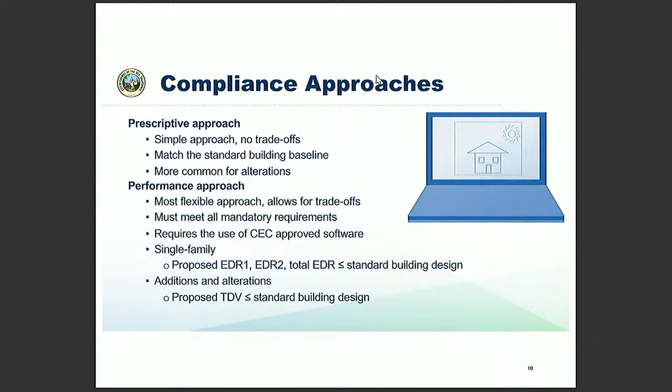These are all the energy design rating performance requirements based on your performance approach.

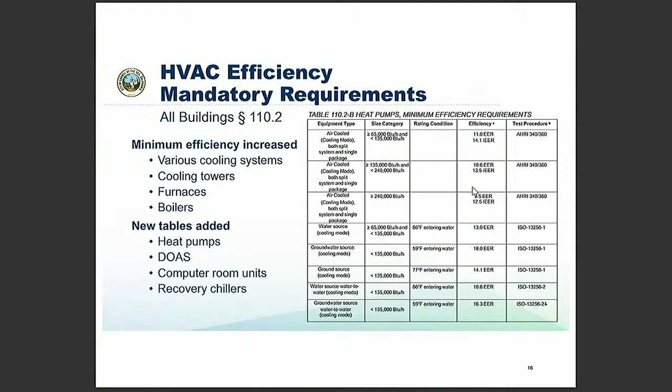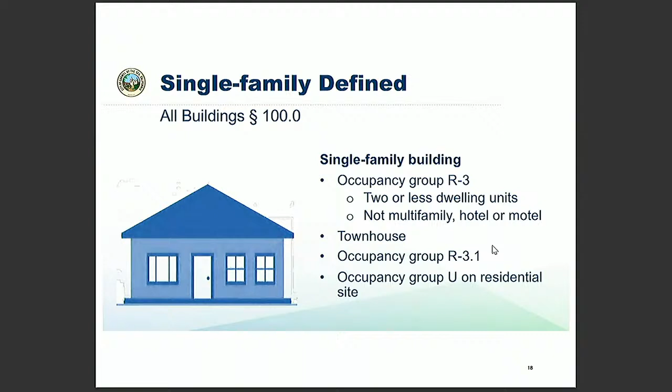So for single family, these are the classifications: R3, 2 or less dwellings, non-multifamily hotel or motel, townhouses, group 3.1, again, may not apply to Carmel specifically, and U occupancy groups on residential sites, meaning garages.

So insulation mandatory requirements, they have made some changes for roof deck, ceiling, and rafter roof insulation. The main one falls under the building code. If you were to design a house under the building code rather than the residential code, there are some more strict insulation requirements. We will get into that a little deeper later on in the slides here.

The insulation requirements, I wouldn't say have been reduced, but they've made exceptions for the ducts and air handling portions of the HVAC systems within the conditioned space of a home. It does not require insulation in those areas if you choose to design your system that way.

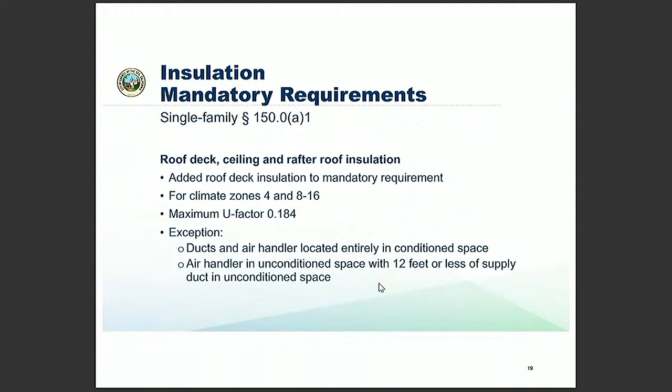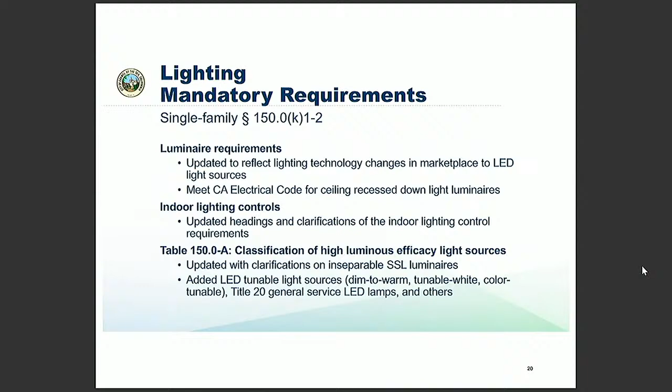So lighting requirements, specifically LED light sources. They're making vast improvements in the LED lighting. So there are various classifications, solid state lighting, which is essentially all the various types of LED lighting that are required. This table is actually a good reference here.

On the left side of the slide, numbers 1 through 6 are not required to be JA8 compliant. So your light cans installed outdoors, other LEDs for decorative lighting, pin-based fluorescent light source using electronic ballasts. If you're hardwired into a high-frequency generator induction lamp, you're not required, and ceiling fan kits that have to meet other lighting requirements, but not the JA8 requirements.

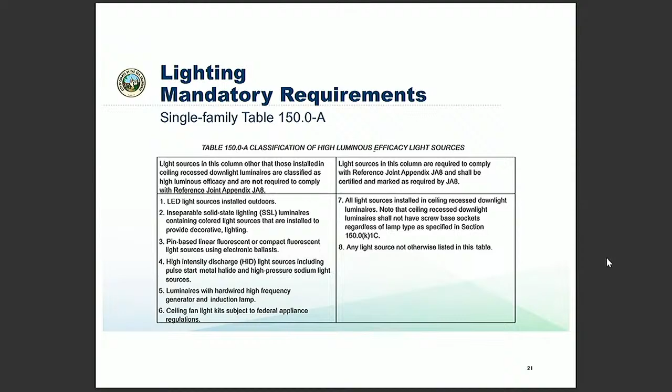All other recessed lighting, downlight within the homes are required to be JA8 compliant, and any lighting that is not specifically listed on this table.

So ventilation requirements, the ducts are still required to be R value 6 or better. Again, this exception about the duct systems located in conditioned spaces. There are portions where if you go through unconditioned space, the entering and coming back through into the conditioned space are not required to be insulated, but the portions that are in the unconditioned space are.

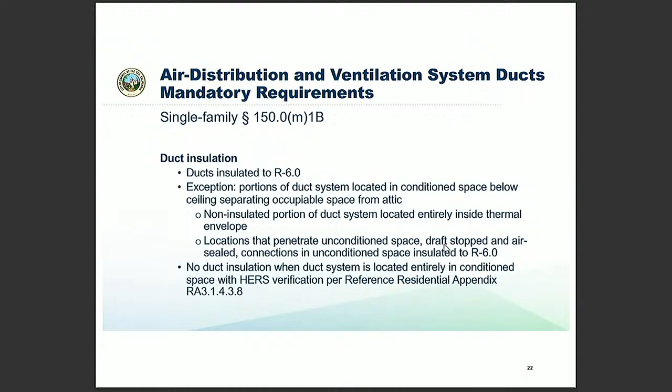This just clarifies the conditions and terminology for the duct sealing tests. I don't believe it's mentioned on the slides, but there is a new requirement. The previous requirement was 40 feet of ducting. If 40 feet of ducting was to be replaced, then you had to have the duct sealage test. That's been reduced to 20 feet, so that's an intensification of that requirement.

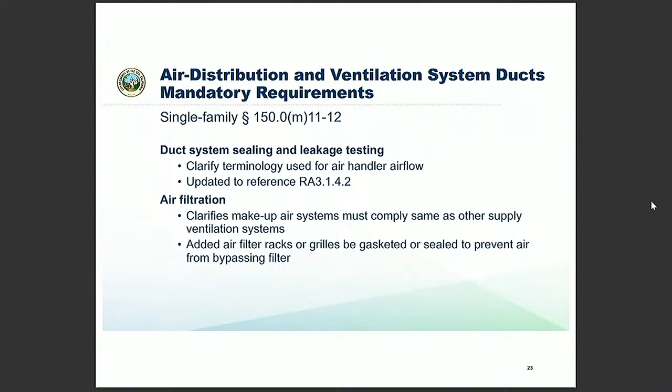Stricter requirements for ventilation and indoor quality. More stricter controls and specifications for air dampers and damper control in variable ventilation systems.

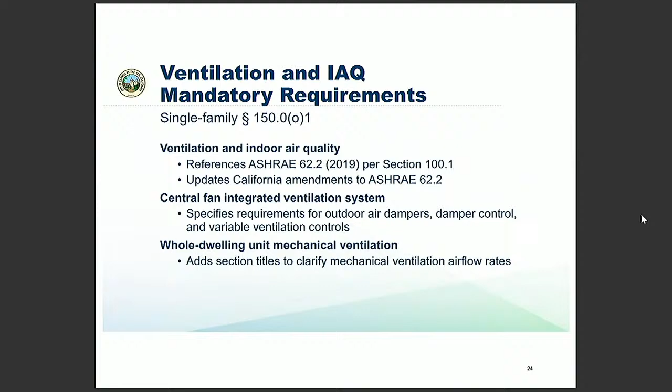This starts to get into the kitchen and bath exhaust requirements. And it's not totally straightforward, they do, and it'll get into it further down as well.

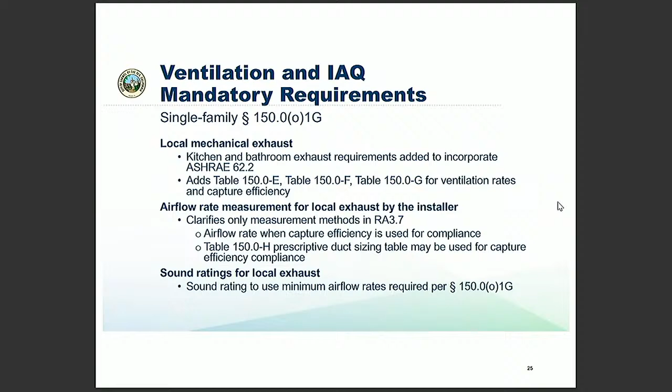But your minimum CFM for what they define as an enclosed kitchen, if it's 12 feet by 14 feet or less, you're only required to have a 100 CFM fan. If it is not an enclosed kitchen, those CFM rating requirements increase exponentially, and we'll have a chart, a table showing us this.

So your vented range hood, as I stated before, if you're less than 12 by 14 feet, it'll be 100. Essentially, your standard will be 300 CFM for any other exhaust fans. The exhaust fans don't necessarily have to be, if you don't have a kitchen hood, you're not required to have a kitchen hood, but you are required to have an exhaust fan with 300 CFM minimum. Bathrooms are still 50 CFM, there's no change in there.

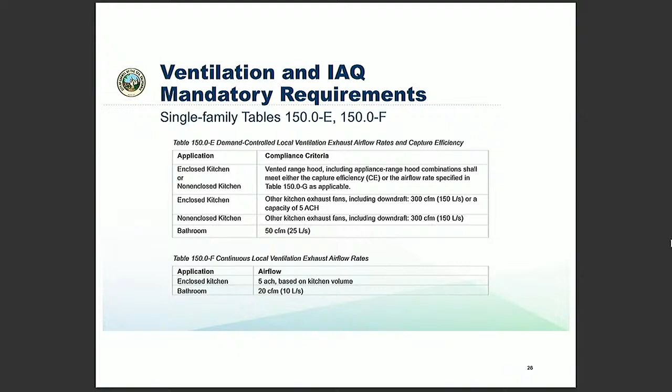So is that a fan in addition to the kitchen exhaust fan? It will be, yes, if you have to meet the total CFM requirements. And the way most kitchens are designed now is usually open, you've got a kind of a great room for everybody to congregate in. So typically your minimum CFM requirement will be 300 CFMs. Even if it's open to the living room? Yes. Dining room? Yep. I think the intent is they don't want anybody smelling the food that you're cooking.

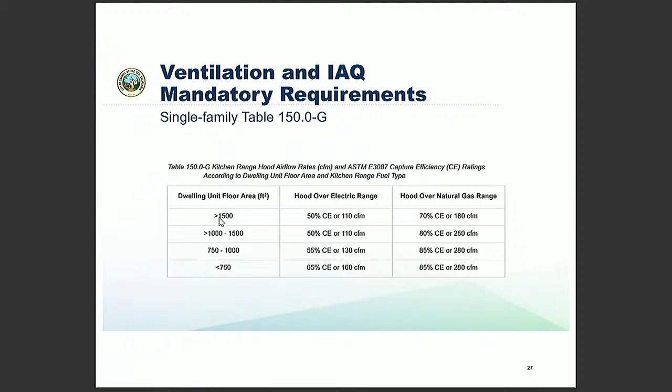So these are the requirements for the range hood airflow rates, if you do have a range hood, and they have different standards whether it's electric or gas. These are the specific requirements for the range hood, and they base it on the floor area of the dwelling unit, on the square footage. So having the range hood, do you still have to put a separate exhaust fan with 300 CFM? Not particularly - if you have the range hood that meets all of the CFMs, you will not have to put the additional fan in.

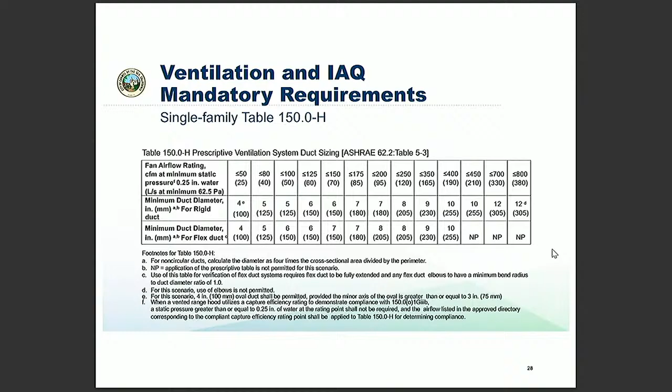Again, another table showing the airflow and indoor air quality mandatory requirements. Your mechanical engineers or energy designers will be using this table. It's a little bit more restrictive than the previous code cycle. You will have to have labels on these systems. It's going to be a big part of that.

All right, here's the biggest portion that's going to be affecting residential use. You will still be able to use gas water heaters. However, you are going to have to dedicate space. The energy code is requiring 2.5 feet by 2.5 feet by 7 feet tall, dedicated space specifically for your electric heat pump.

So they give you options here. If you're within 3 feet of the water heater, meaning your dedicated space, then you need to provide the 125 volt 20 amp circuit with 120/240 volt 3 conductor, your typical wiring. You'll need to reserve and label the single pole breaker in the main panel for that. In addition to that, not on the energy code requirements, you're also going to have plumbing set up as well - you'll need to have hot and cold water supply. So essentially, at any time the homeowner decides to go to an electric water heat pump, they can disconnect and plug and play. They can go down to the big box store, buy what they need to, and it's ready to go.

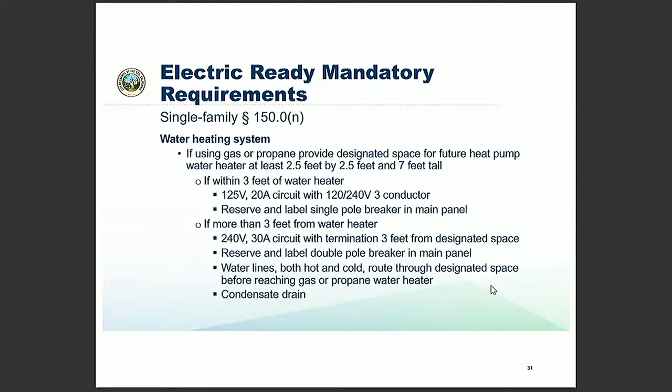Energy storage systems, backup batteries, they need to be ESS ready. You do not have to install a backup battery at the time - this is for new construction of homes. But you will have to have interconnection equipment, which means you'll need a dedicated sub-panel that supplies each of these branch circuits. You'll have to have 4 supplied branch circuits. One of these will supply the refrigerator, lighting near the front door, one outlet in the bedroom, and it does not specify what the fourth circuit is for, but I suppose that would be your choice.

Main panel minimum bus bar rating of 225 amps - that's already required by the electrical code for your solar system. Again, you'll need also to set up space for your transfer switch within 3 feet of the main panel. That will be your backup supply for the sub panel once you have a backup battery set up. And you'll have to have all of your raceways and isolation equipment to allow the connection of that power source.

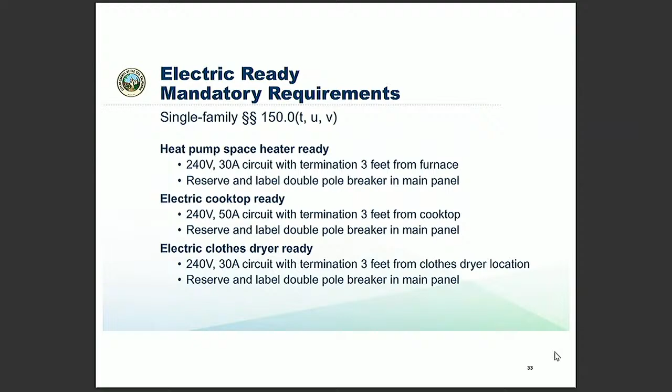This goes back to what I was referencing before. If you have a 12 by 14 enclosed kitchen, you'll have to have at least a 100 CFM fan, which does not exceed a total of 60 square feet. Basically, if you have two doorways, anything larger than two standard doorways, you're going to jump into the next portion. If you do not install that range hood, you need a minimum 300 CFM fan or 5 air changes per hour to meet the ventilation requirements.

And yes, going back to your question, sir, if you have the 100 CFM fan, then you need to install at least an additional ceiling or wall exhaust of 140.

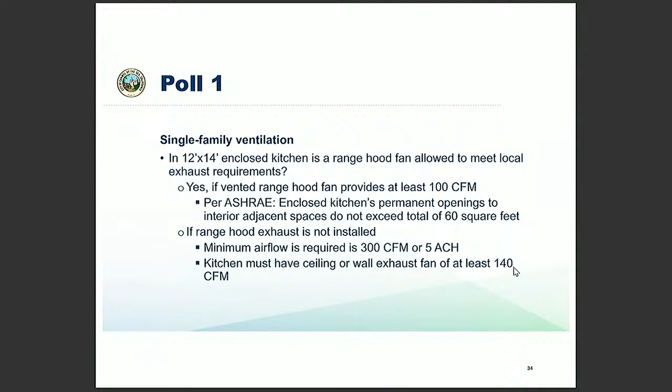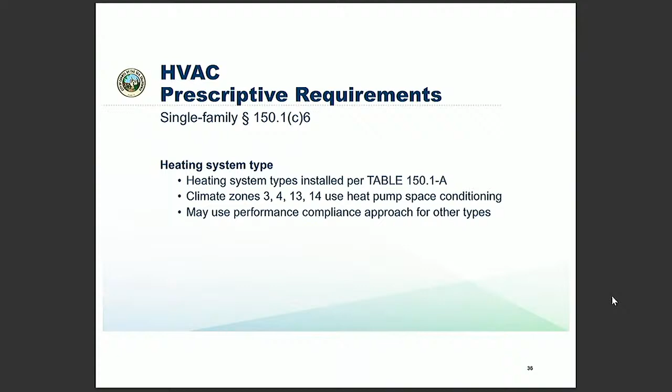Okay, single family updates. So our climate zone is climate zone 3. Essentially, the allowance of gas appliances, you will use the performance compliance approach. That's where the electrical requirements for electric-ready appliances comes from. These are all the tables for your requirements: duct installation, whole house ventilation, and heating and cooling.

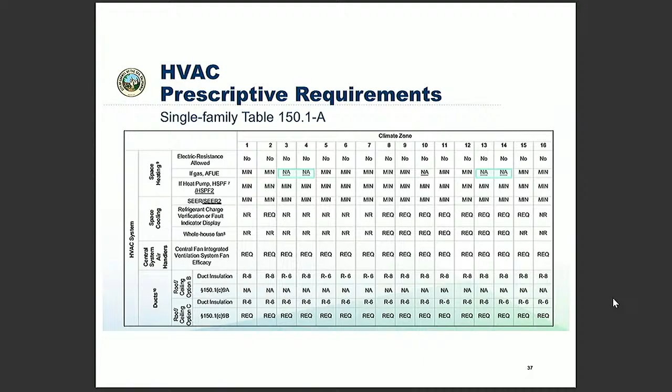Dwelling units 500 square feet or less, ADUs are exempt from these requirements.

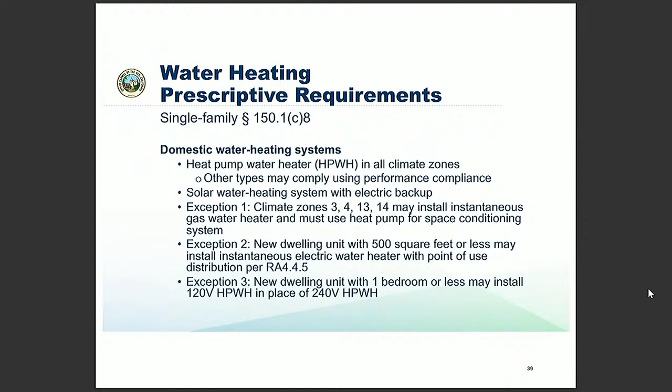So this is kind of going back over domestic water heating systems, whether you go with a heat pump or a solar water heating system with electric backup. Again, this goes back to our exceptions, and we're in climate zone 3. You can install the gas water heater, but you do have to have the infrastructure for the electric. Again, ADUs and other dwelling units less than 500 square feet are exempt from that requirement.

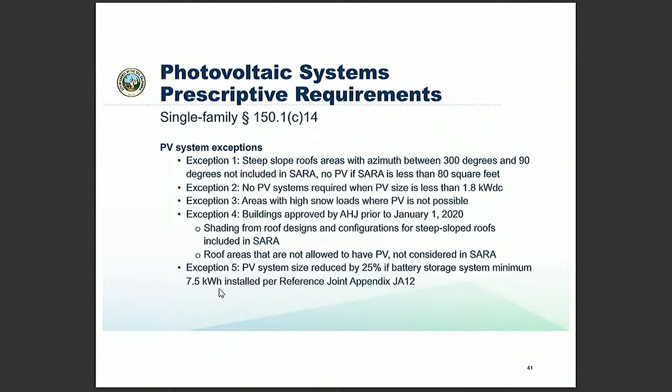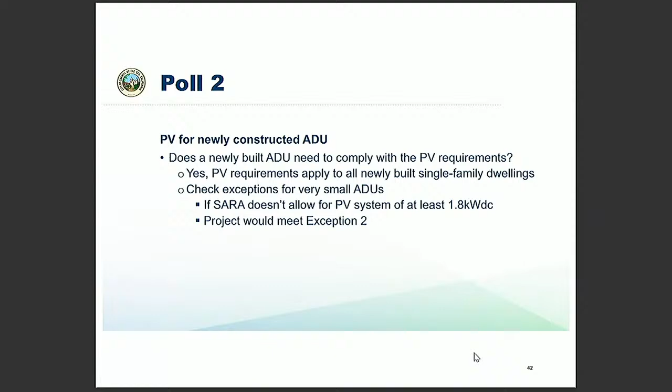These are some of the solar requirements. They've gotten a little stricter. The solar contractors will be very aware of these requirements and exceptions. Solar is still required for ADUs.

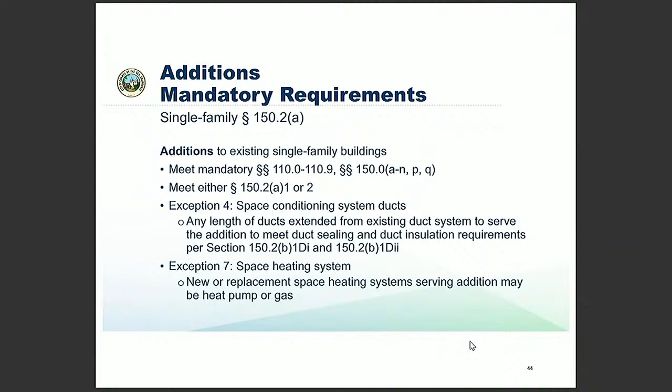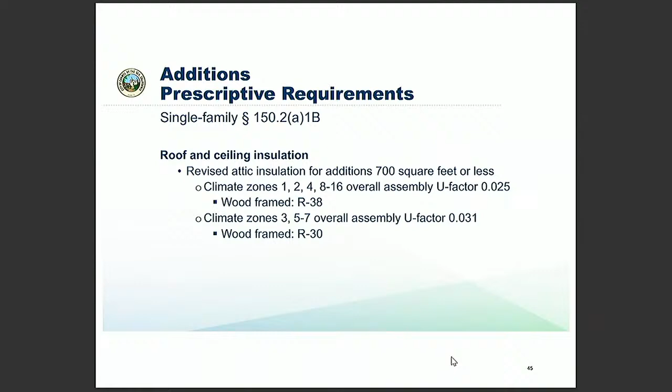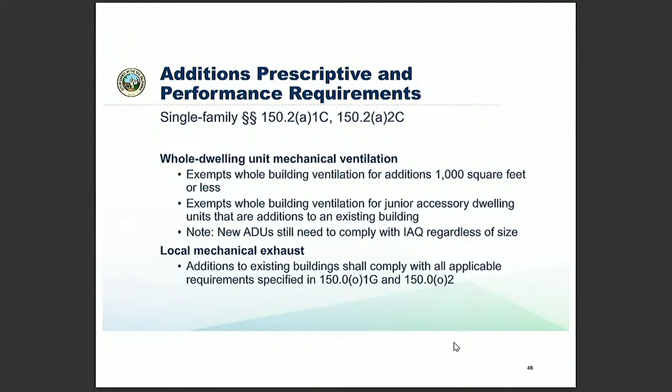Okay, so I was 5 feet off. It's more than 25 feet. So the previous was 40, and now it's been reduced to 25.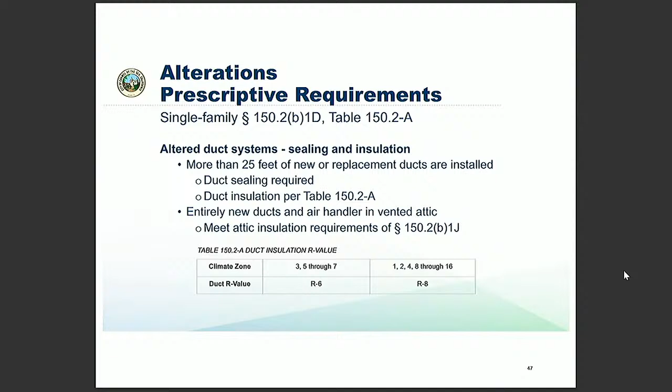The duct leakage standards have been reduced. I believe it was 15% in the previous cycle. Now it is 10 or less in order to pass the duct sealage test.

This one may be a big one for existing homes. If you have an existing space heater, say in the hallway, a gas space heater, you will not be able to replace that with a standard electric resistance heater.

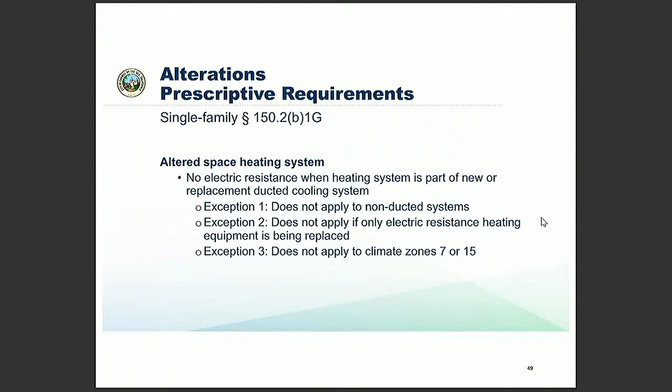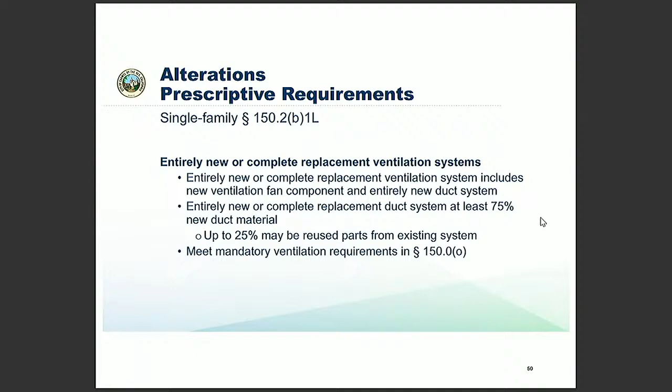I guess I read that wrong. Non-ducted systems. This is basically reiterating, if you're replacing your entire system, you're going to be getting a duct sealage test.

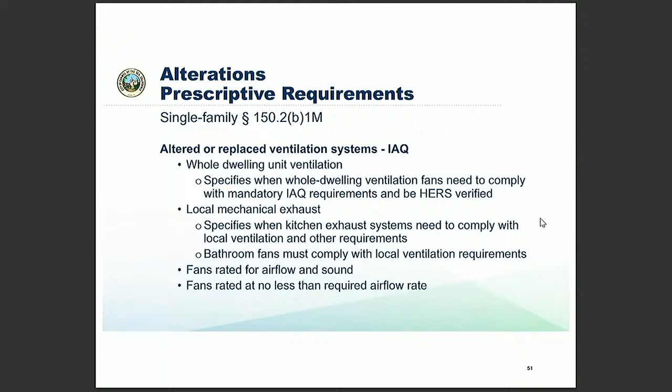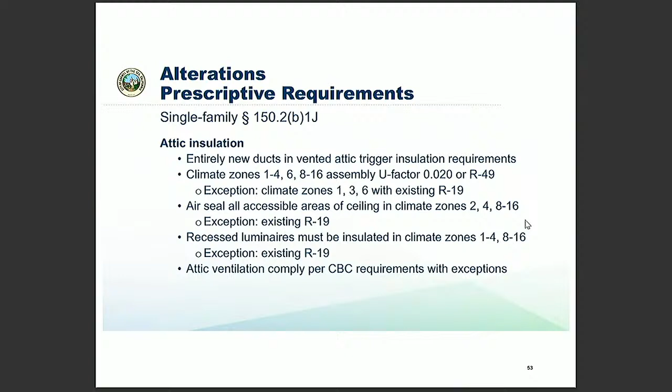Roof replacements, not applicable. Attic insulation, nothing's changed for our climate zone.

So for range hoods, if you're going to be changing out your range hood, you do need to get HERS verification. If you have a contractor doing this, they should be getting pretty familiar with this very quickly. I do expect we will run into and have to provide some instruction on how to complete the verification forms for some contractors.

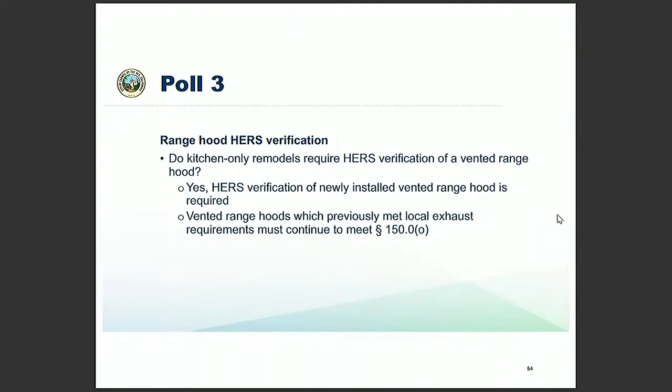So for multifamily, we're going to skip over a lot of the multifamily.

So for online resources, this presentation will be available on our website shortly following my presentation today. All of these can be found on California Energy Commission's website. Energy Code Ace is a fairly good resource as well, especially if you as a homeowner or a designer would rather design these yourself rather than going to an energy compliance specialist. So that's the end of the Energy Code update.

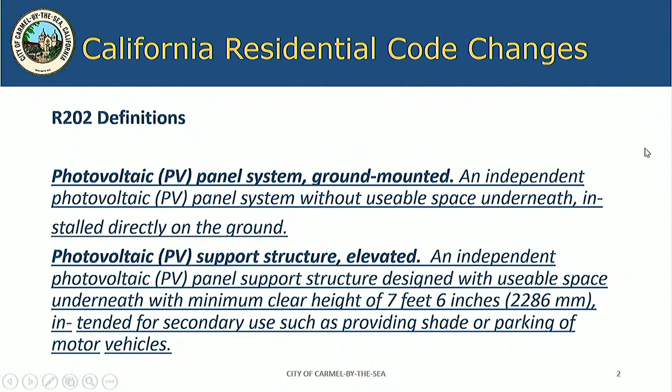The first major change is specific definitions. They basically had a ground-mounted system, and they've added definitions to differentiate between a ground-mounted system and a support structure. If you go by a lot of schools or perhaps an airport where they're now using solar systems essentially as carports, they've provided a definition for each to differentiate the systems.

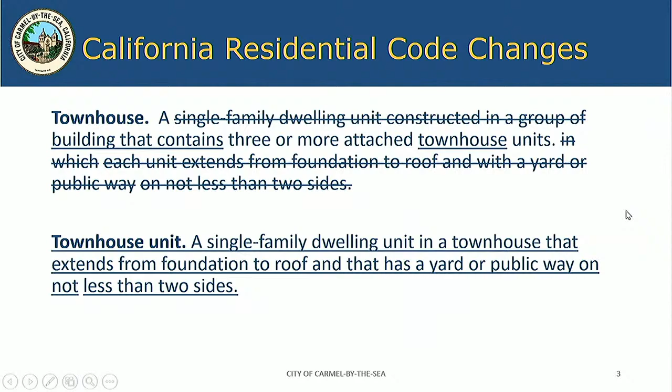So for irregular buildings, these are buildings built on very steep slopes that exceed 1 vertical to 5 horizontal. What this specifically does is provide the definition and then increased requirements as far as foundations and how the structure is required to be built.

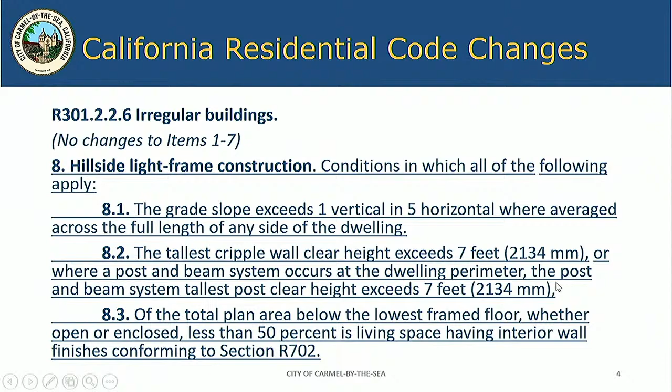This is a continuation of the previous slide, where item 8, when all of the following apply, you are required to get engineering, essentially is what it says.

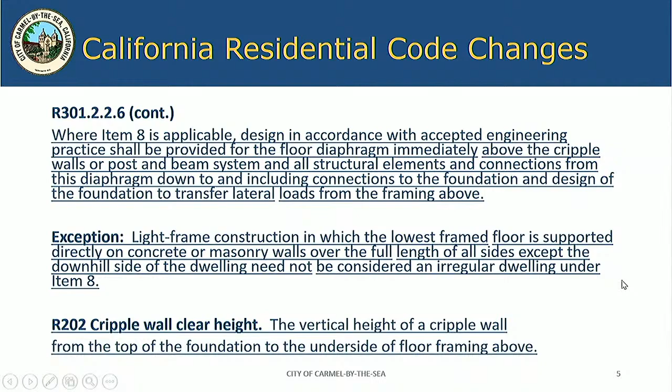In this new code cycle, they've added an exception for story heights, where previously you weren't able to exceed 11 foot 7 inches for bearing walls. You're now allowed to go up to 13 foot 7 inches, as long as you follow the following exceptions.

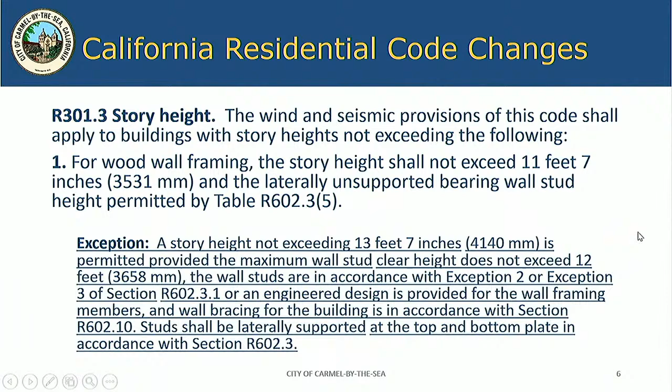Oh, I guess I'll need to edit this and add exception 2. But essentially, if you get an engineered design, you'll be able to get 13 foot 7. Makes sense.

This is for opening protection, the requirement for the self-closing door from an attached garage into a dwelling area. They added that the doors shall be self-latching as well. So in addition to having a self-closing or automatic closing device, the door actually needs to be able to latch on its own. Some door closers are not strong enough, and in the past it doesn't create that seal we need to protect from the vehicle exhaust.

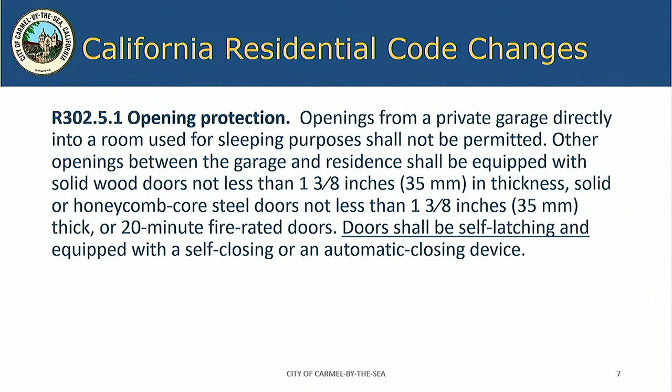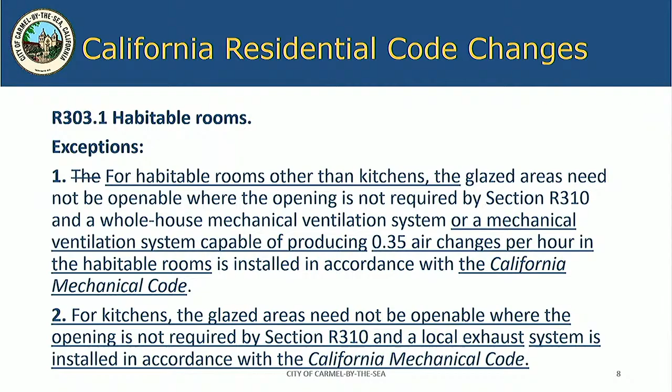So for habitable rooms, this is very interesting. For habitable rooms other than kitchens, if you're not required to have an egress window or door, and you can get the air changes per hour that are required, then no egress window is required. Again, in kitchens, where you're not required to have egress, you don't need windows. There may be situations where that might be necessary or to meet planning conditions in the city of Carmel. That may be accomplished if you have a whole house ventilation system.

They've added 2 exceptions; the previous exceptions I did not include. These are the 2 added exceptions. If you have less than 80-inch height of the basement, you're not required to have an egress rescue opening, so as long as you have a door, you do not have to put in a window or a window well, if it's shorter than 80 inches. And if you have sleeping rooms, as long as you have an egress door, you're not required to have an egress window.

If your basement's less than 200 square feet, again, you're not required to have an egress window. Obviously you're going to have a door into that space, and the Building Standards Commission has decided that's acceptable. The other exception is storm shelters.

If you have an automatic sprinkler system, again, no windows required in basements with sleeping rooms. And if you have one door or two doors from the basement, the second door would count as your second means of egress.

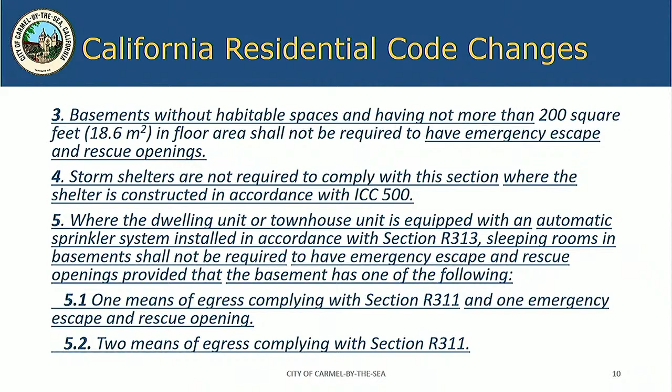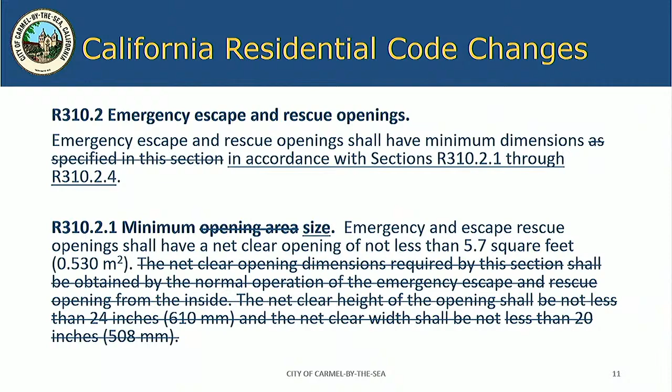They've just taken out a bunch of the language to clarify. You need not less than 5.7 square feet; it'll be 5 at grade. Your standard minimum dimensions. That section was just put in for more clarity.

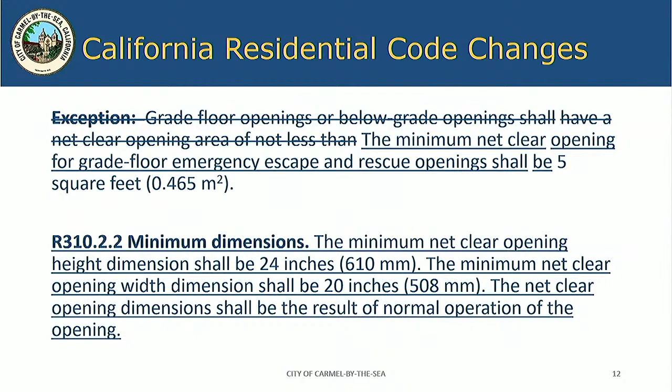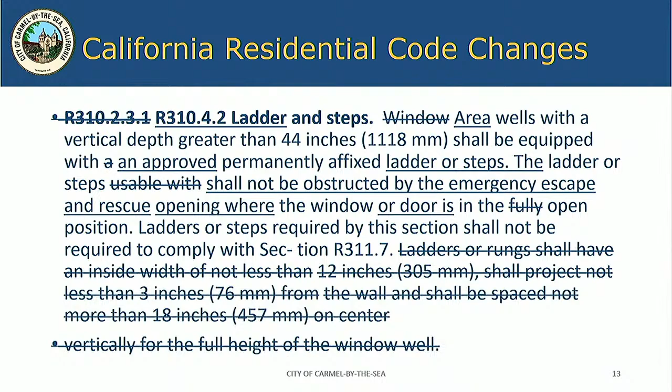This I included because rather than having your basic window well where you need a minimum 36-inch and then you can put a ladder, this provides a different design for the means of egress. Rather than have the ladder, you can put doors instead of windows as your emergency egress. It does not have to meet the definition of a door size as long as you have the dimensions required. You can have a door instead of a window.

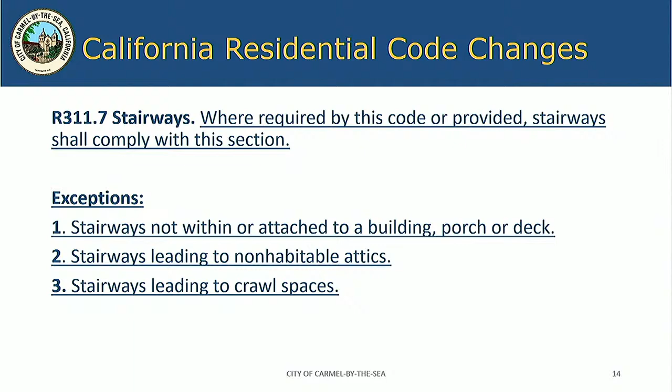So if you have stairways that are not attached to a building, porch, or a deck, you have stairways going to non-habitable attics, and you have stairways going to crawl spaces, they are not required to meet the code requirements of stairs.

Section 317, this is quite a significant one as well. This is protection of wood from decay. Wood joists or wood structural floor that is within 18 inches to exposed ground, wood girders that are within 12 inches, and wood columns or posts that are closer than 8 inches are now all required to be pressure treated. Yeah, that'll be expensive. And anything resting directly on concrete, and once again, anything closer than 8 inches to the exposed ground, are going to be required to be pressure treated.

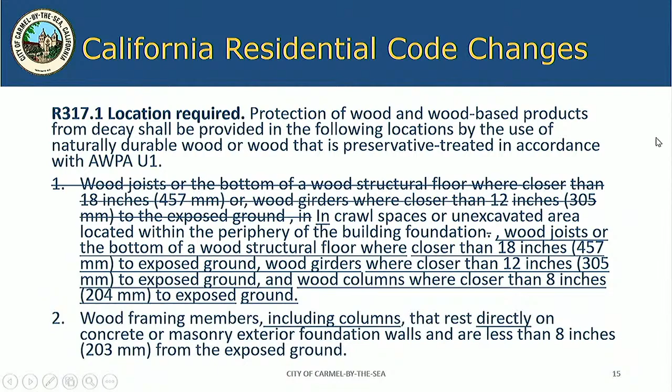Any exterior structural supports are going to be required. So now your exterior balconies will also be required to be built with pressure treated lumber. Our area does not meet this exception. This is just new code language in the state code.

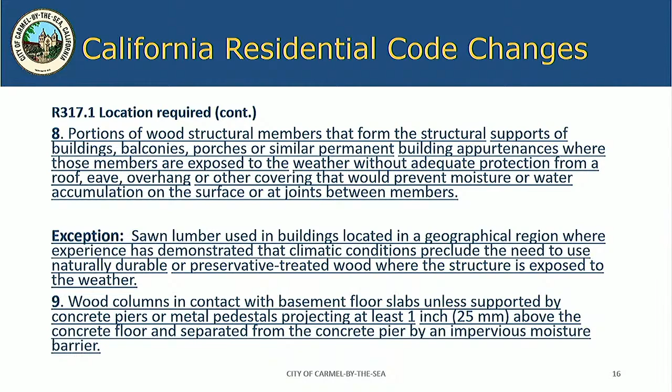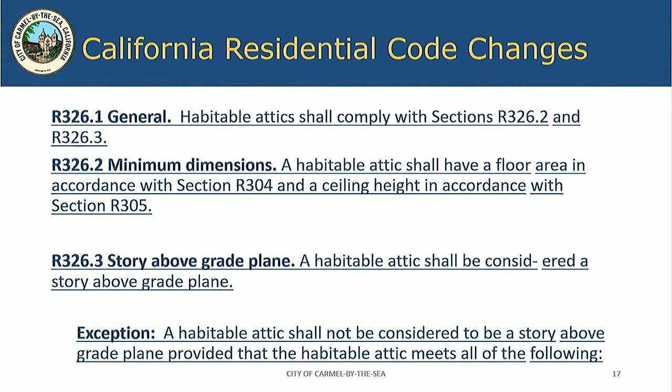Okay, they've created a standard and a definition for habitable attics. Essentially, what it says is, if you have a non-sprinklered house, you can create a habitable attic, and it does not even count as an extra floor if it is less than one-third of the floor below. If it's a sprinkled home, then you are allowed up to half the square footage of the story below.

This is the language that I just talked about. There's specific design in the code. I didn't put any illustrations in my slides, but they do provide a design, and I believe they'll provide it in the code. This is brand new, isn't it? Yeah, everything underlined is new language.

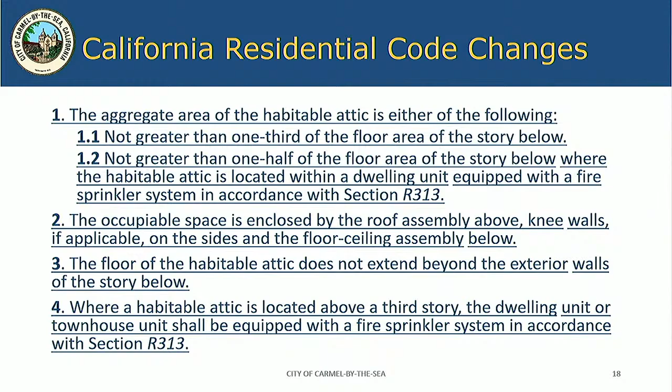Now, even though it's not considered a floor, if the habitable attic is located above a third story, it will not apply to Carmel, but it will have to have a fire sprinkler.

Energy storage systems shall be installed in only the following locations: detached garages and detached accessory structures, attached garages that already meet the required fire separations, outdoors not less than 3 feet from doors or windows directly entering the dwelling unit, enclosed utility closets, basements, storage or utility spaces within dwellings. They shall not be installed in sleeping rooms or closets or spaces opening directly into sleeping rooms. The same application as your standard water heater.

I do have the feeling that this may change, especially with local issues and battery fires and things like that. My suggestion is that you install these outdoors, because there will come a point where a definition will have to be made about when your garage becomes an energy storage room or cabinet. Once they've definitively figured that out, it's going to require a 2-hour fire separation. That's currently in the fire code as well. So I predict this will change in the next cycle, and I don't even think they'll allow them to be in attached garages, but I could be wrong.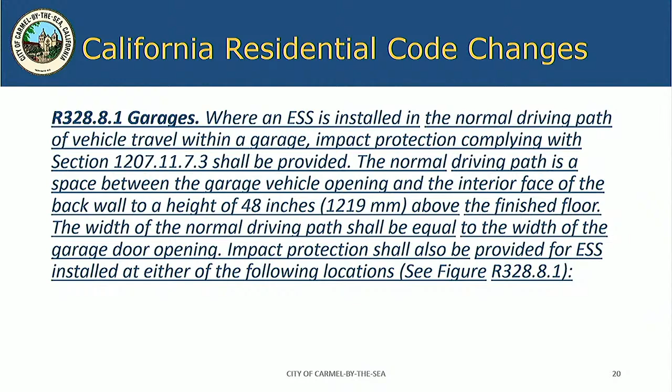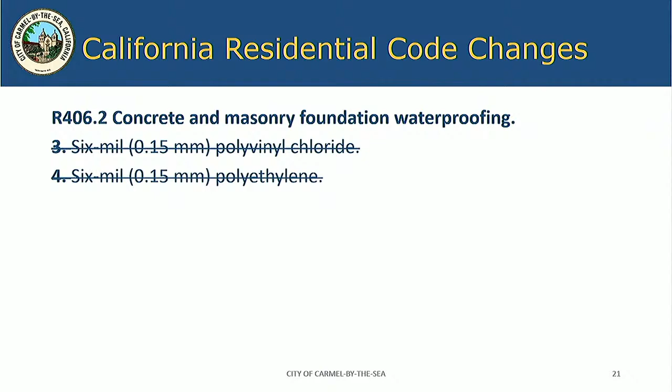For foundation waterproofing, 6 mil is no longer acceptable. 10 mil is the minimum thickness that you'll need for foundation waterproofing. Apparently, they've done some studies that suggest that 6 mil is just not efficient enough to provide the waterproofing.

This is kind of a big deal. For roof sheathing, for our wind zone speed, which is 110, all roof sheathing is now going to be 6 inches on center. No more 6 and 12, it's all going to be 6 and 6 - 6 in the field and 6 on the edges. So you're going to have to budget for that.

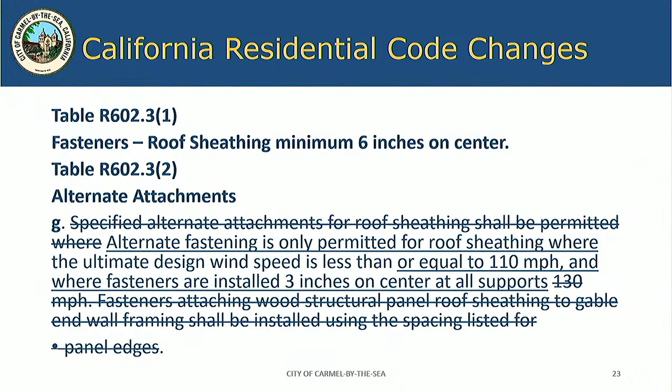This is specifically for stone and masonry veneer in our seismic design category D. If you exceed the first story, they have specific requirements for veneer attachments. So if you want the whole house to look nice and Carmel-like with the Carmel stone, and it's a 2-story house, you're gonna have some engineering involved there.

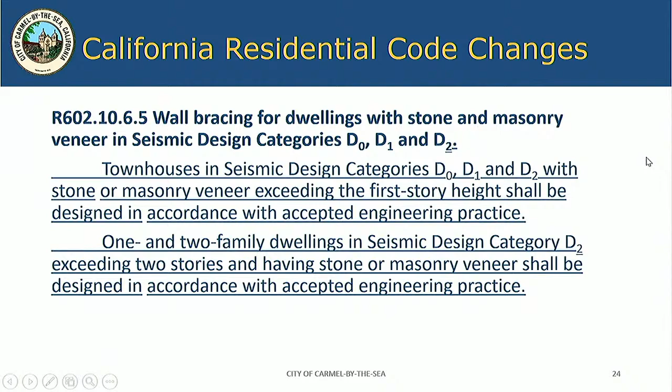This is another big one that affects Carmel. They've added this section for water resistive barriers in moist or marine climates. Odd thing about this is they reference the international codes, which are the model codes, which we do not adopt, but these are the model codes for the state. And so they designate our area, for obvious reasons, as marine climate zone.

So now, in addition to your water resistive barrier, on top of it you'll need to add another layer of drainage material. What this code now says is not less than 3/16 of an inch in depth, shall be added to the exterior side of the water resistive barrier. In addition to that, drainage on the exterior side shall have a drainage efficiency of not less than 90%.

A 5-minute Google search brought up more than 3 products that can easily achieve this. Now, most of these products are not 5 millimeters thick. However, as the authority having jurisdiction, I will accept alternative means and methods, because the manufacturers of these products do meet the ASTM standards, and they exceed the minimum drainage requirement of 90%.

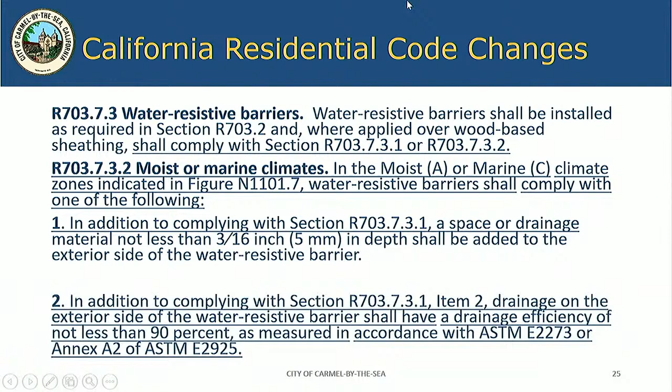I threw this section in here for wood roof framing. The long and short explanation of this particular new language is that if you have a vaulted ceiling, essentially it needs to be engineered, and you need to get a stamp on it, because they have more enhanced requirements for ceiling joist connections, basically the whole roofing system altogether. We just need an engineer, almost, period.

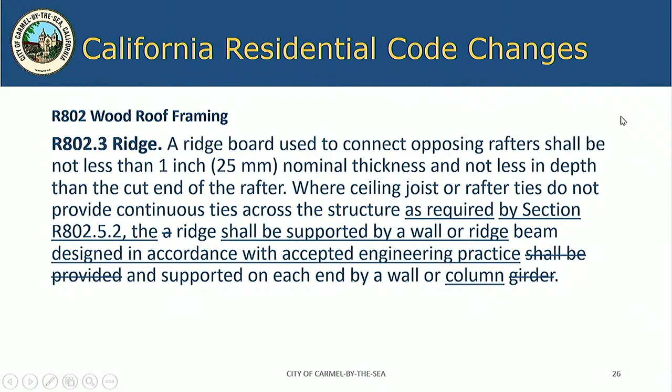Again, ceiling joists and rafter connections - there's a more stringent fastening requirement. There's several new tables that just call for more hurricane ties and joist hold downs and the rest of it.

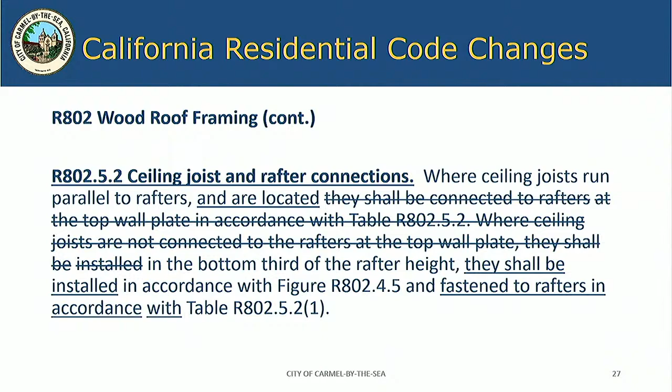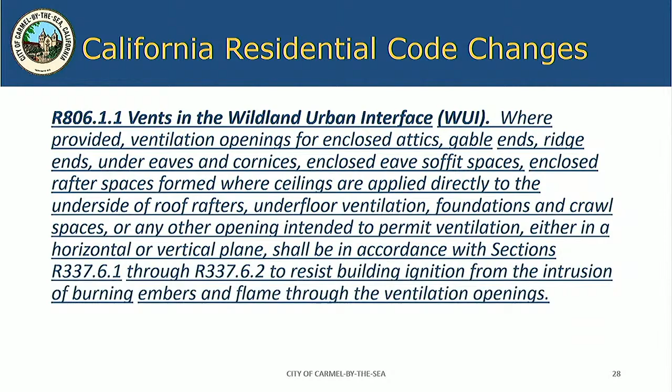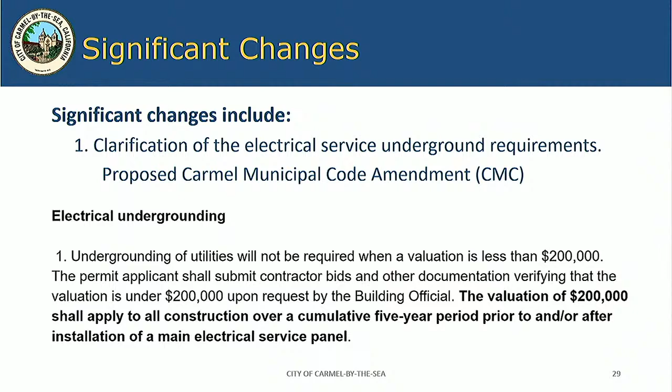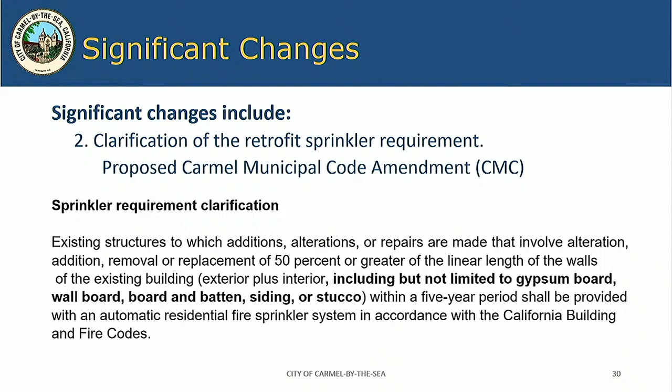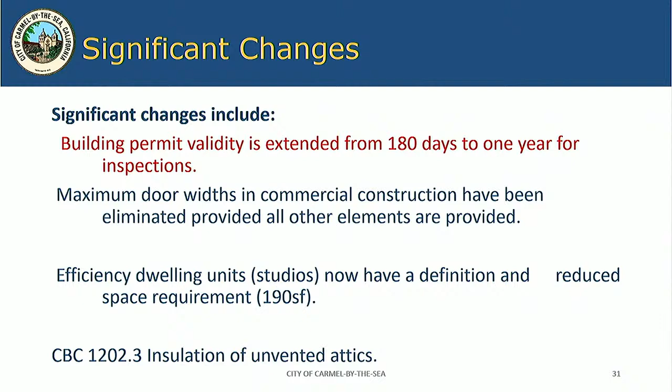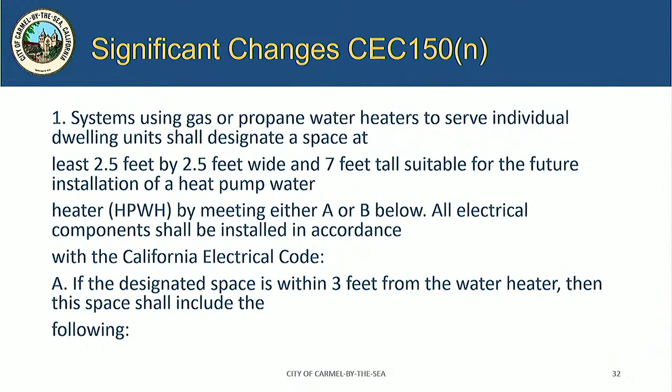This is just a reiteration of the requirements for electric heat pumps, whether it's for temperature control or your water heaters. Lots of dedicated circuits, and they need to be labeled.

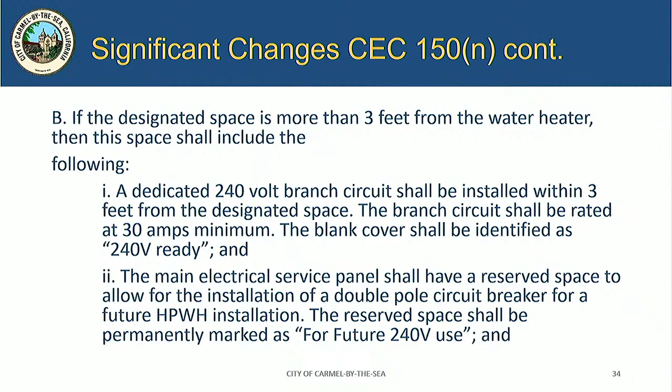So that is the end of this presentation.

So is there anybody online, or Neil, do you have any questions? Yes. Now will this be available online? Yes, yes. We'll be posting this in the building portion of the city website.

Excellent, thank you. One of the things - we've always had this issue about the 1-inch ventilation space required in a vaulted ceiling. The way you could get around it was by using rigid closed cell foam and pack it in there, and then you wouldn't have to have that 1-inch ventilation. But some insulators are telling me that's still not good - they say it still tends to develop moisture over a period of years. I'm talking to older guys who undo these old roofs. Has there been any change in anything that would affect that? I mean, you can spray closed cell foam directly on the ceiling, I understand, but that's very expensive. But there hasn't been anything to change any of that, has there?